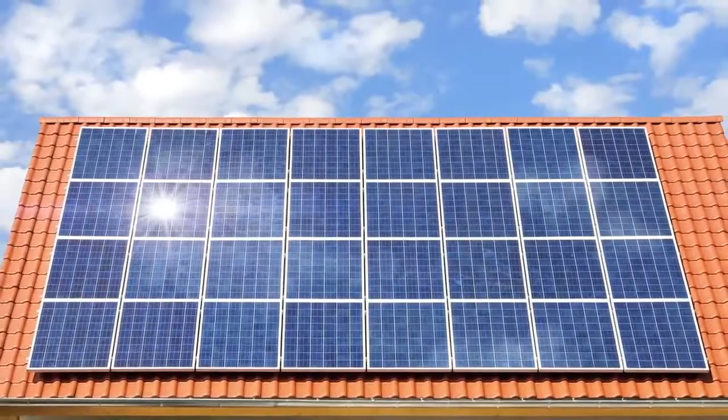In the real world, solar panels have to endure constant temperature swings, morning to evening, shade to sun, dew to frost. And temperature variations are tough on solar panels because their electrical connections are metal. When the temperature rises and falls day after day, year after year, different expansion and contraction rates in that metal can cause those connections to break. The problem? Broken connections can't conduct energy, so the panel loses power.

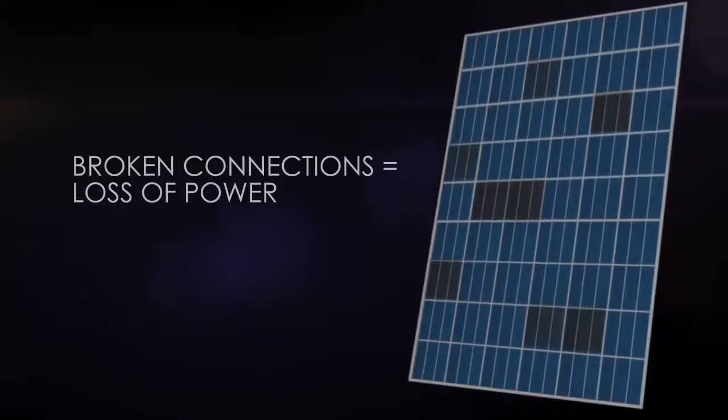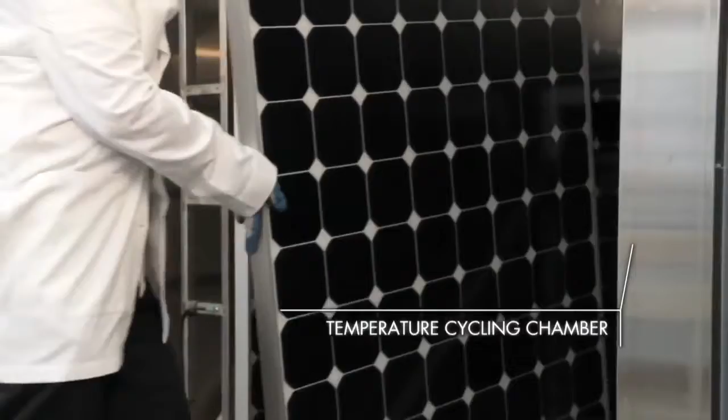SunPower is dedicated to ensuring that its panels perform well over 25 years and keep working, hassle-free for every one of them. So at the SunPower Labs, scientists test for temperature changes at 13 times the industry standard. This is the temperature cycling chamber, designed to simulate real-world temperature changes for over 2.5 decades.

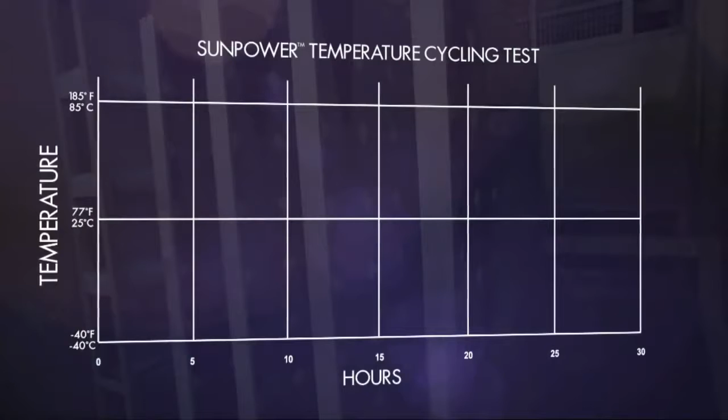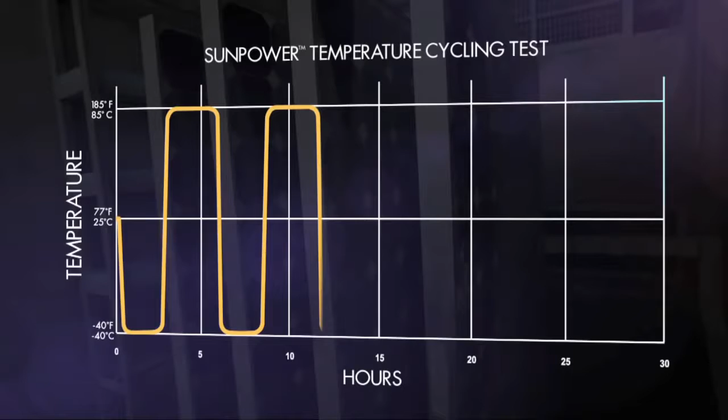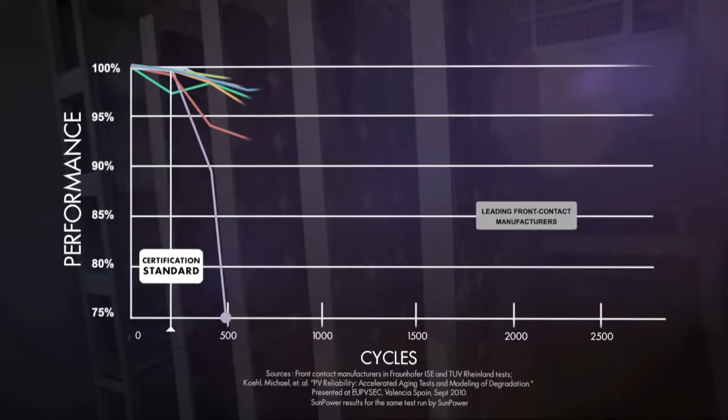Inside, solar panels are subjected to rapidly changing temperatures. First, the temperature falls to -40 degrees Fahrenheit. Then it rises to 185 degrees Fahrenheit, all in under 5 hours, and then it cycles again, and again, and again. How does a conventional front contact solar panel fare in these conditions? Not well. In fact, as soon as the test begins to exceed minimal industry standards, leading front contact panels start to fail, but under the same test conditions, SunPower continues to deliver.

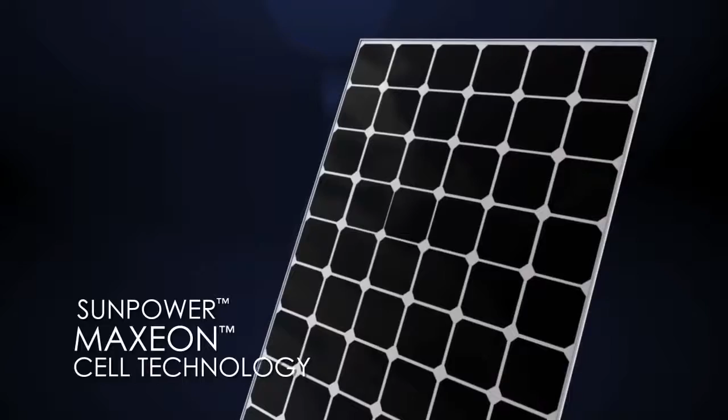Why? SunPower's unique patented Maxeon cell technology uses thick, plated copper contacts with built-in strain relief. They're robust and flexible, so they can handle the expansion and contraction that comes with temperature variation. Conventional panels, on the other hand, use thin and narrow baked-on front contacts, and with no strain relief, the electrical connections can break.

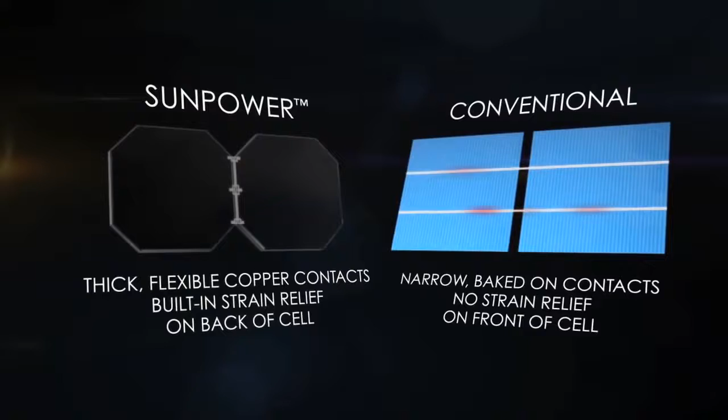In the real world, solar panels have to stand up to moisture and humidity, rain, snow, fog, wet summer heat, again and again, year after year. And humidity can be a big problem because when moisture penetrates solar panels, it corrodes the internal metal components of the panels. It can also react with the silicon in the cells, further reducing power output.

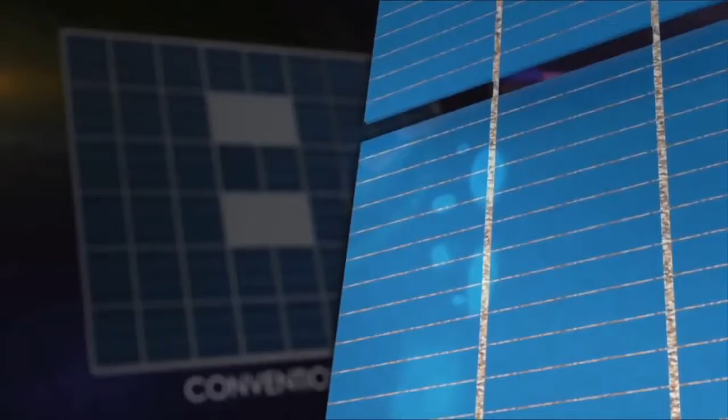SunPower is dedicated to ensuring that its panels perform well over 25 years and keep working, hassle-free for every one of them. So at the SunPower Labs, scientists test panels for moisture and humidity changes at 3 times the industry standard. This is a damp heat oven designed to simulate real-world humidity for over 2.5 decades. Inside, panels are subjected to 85% humidity at 185 degrees Fahrenheit.

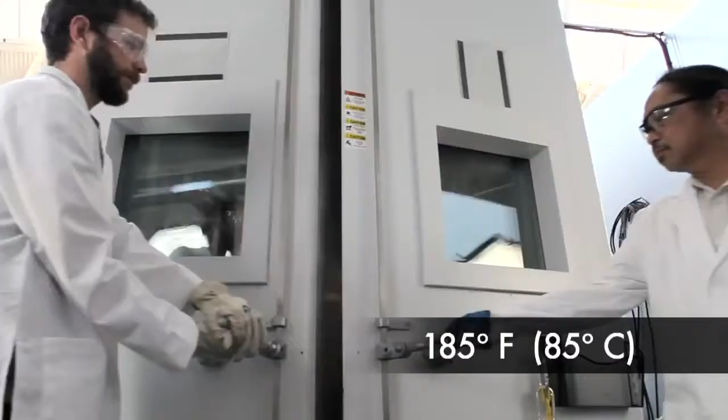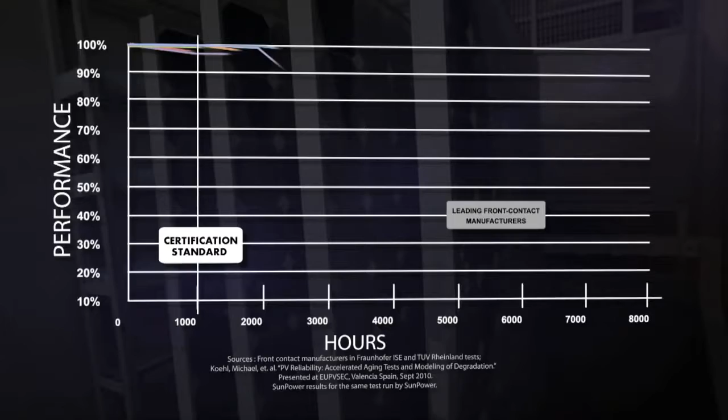How does a conventional front contact solar panel fare in these conditions? Not well. In fact, as soon as the test begins to exceed minimal industry standards, leading front contact panels start to fail, but under the same test conditions, SunPower continues to deliver.

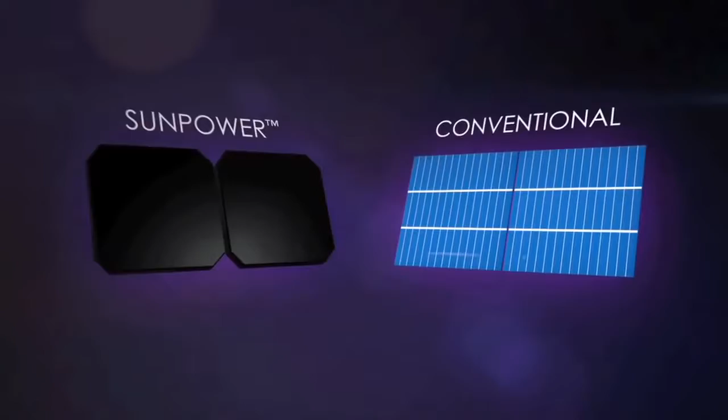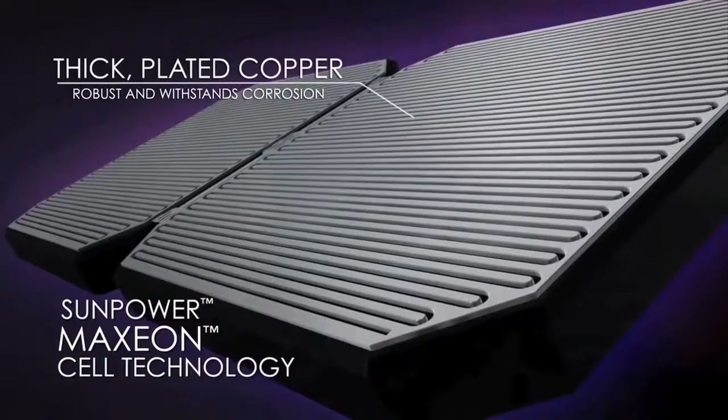Why? Cell design is key. Conventional cells use thin, baked-on metal for the electrical connections. In humid conditions, the thin metal corrodes and breaks electrical connections, resulting in power loss. SunPower, on the other hand, uses its patented Maxeon cell technology, a unique design with thick plated copper. It's extremely robust and withstands corrosion to deliver consistent power.

In the real world, solar panels have to deal with heavy loads, wind, hail, snow. Even shipping and installation stresses can cause cells in the panel to crack. What's the problem with cracked cells? In conventional panels, damaged cells essentially stop working, reducing the panel's power output. They can also cause the panel to heat up and accelerate aging.

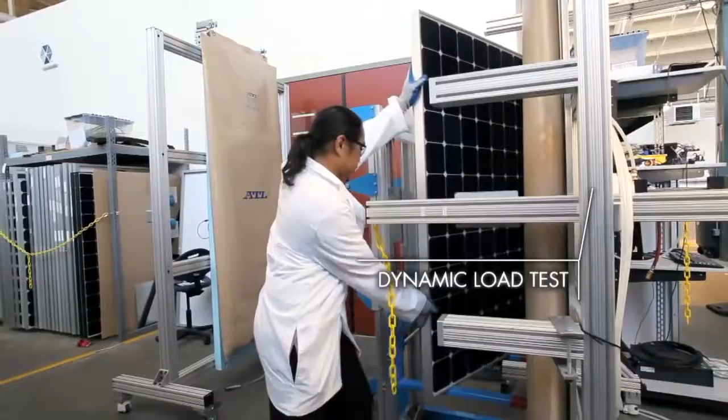SunPower is dedicated to ensuring that its panels perform well over 25 years and keep working hassle-free for every one of them. So at the SunPower Labs, scientists subject SunPower's panels to a range of intense loads to make sure that they can survive a lifetime of physical stress. This is the dynamic load test, uniquely designed by SunPower to mimic real-world loads.

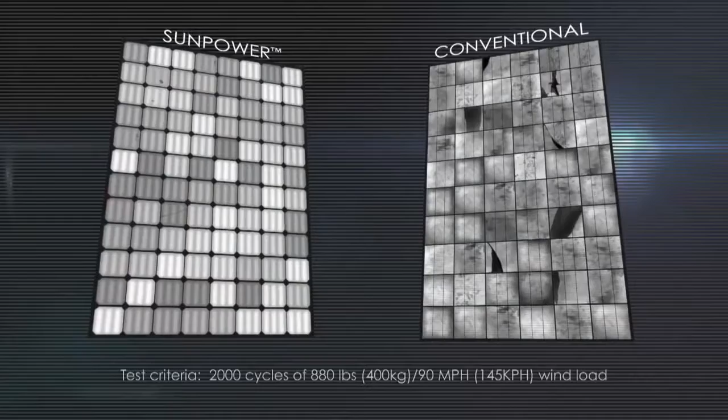Sure, it may not look like much, but this panel is enduring pressure equivalent to 90-mile-per-hour winds, applied over and over. That's 880 pounds of weight applied again and again. What happens to a SunPower panel under so much stress? Very little. The conventional panel, on the other hand, shows significant damage, resulting in power loss. Why such a difference? Cell design is key.

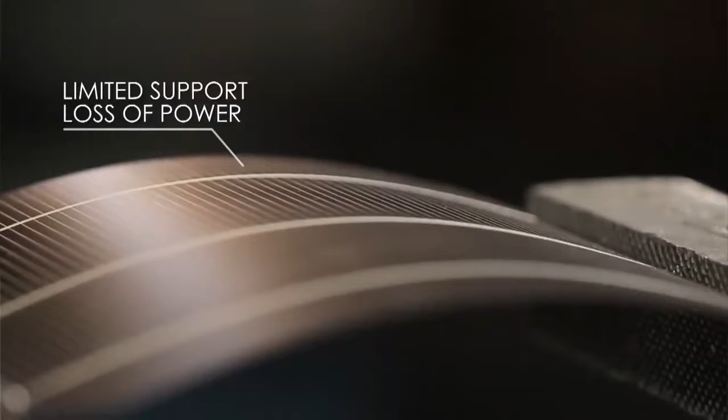Conventional front contact cells have a thin layer of metal baked onto the silicon crystal, which offers very limited strength. Under pressure, the cells shatter, causing a precipitous loss of power. But SunPower's patented Maxeon cell technology has thick, plated copper covering the back of the cell, providing structural strength and allowing even a cracked cell to continue producing power.